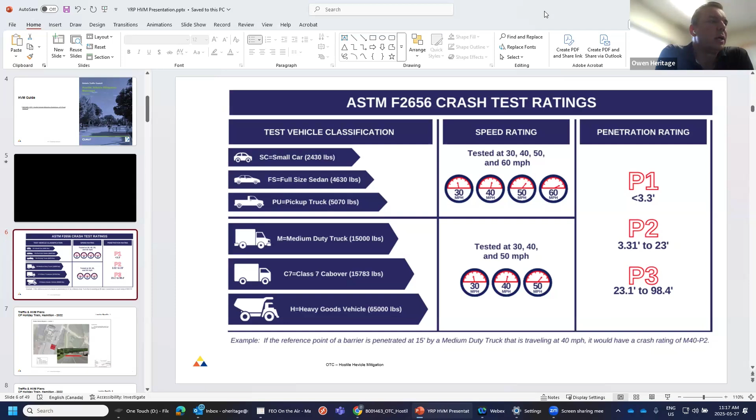So you need to be able to have the space and utilize the space accordingly to protect the crowd and protect the people properly. So when we design a traffic plan itself, we build in that buffer zone. So when we're actually designing, you need a traffic plan, then you build a hostile vehicle mitigation plan. Within that plan, you build in your buffer, so you're safely protecting the occupants within it.

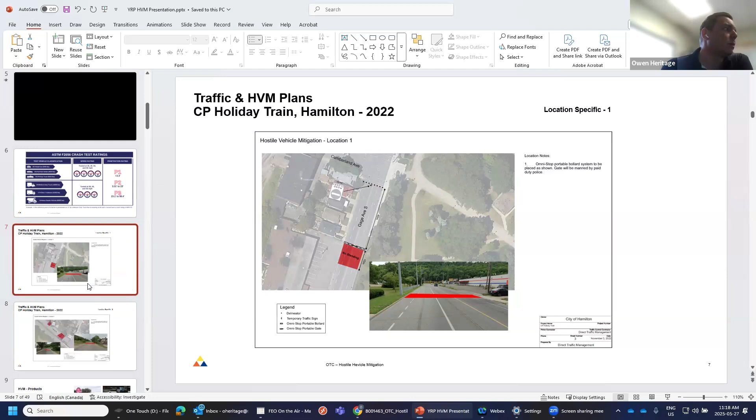And what happens is if you stick out an HVM barrier, you give this misconception of safety, but if it's not put out properly, it's not as safe as what it appears to be and what everybody believes it to be. So the most important part is understanding what barrier you're going to use and what it's being tested at and what it's rated at, so that when you design your surroundings, you have the appropriate space. And that you blend the traffic management plan and the HVM plan together. Space is always a premium in events because you have a certain square footage and you want to fill it for events.

But the most important part is to actually build in that buffer area. And this is where the misconception comes in. The other thing is, if you look at the picture on the screen here where we built in the buffer zone, most people always focus on blocking the roadway, but vehicles can get around. So if it's a planned or coordinated attack, vehicles can get around the barriers by using sidewalks or boulevards.

So you also want to take into account, and when we build a vehicle mitigation plan, we look at what is in that physical area. Is there a lamp post? Is there a planter? Is there other obstruction? So you can use physical attributes within that roadway to help you when you're actually planning out. Is it a tree? You can coordinate on where you put your placement of the barrier itself.

So there's lots of different HVM products on the market, and there's lots available for purchase and rent in Ontario. Each one has its own sort of set of standards, and each one comes with its own pluses and flaws in terms of how it goes out, and each one has its own cost structure. The more heavy duty barriers obviously are more expensive because it takes equipment to move them to site.

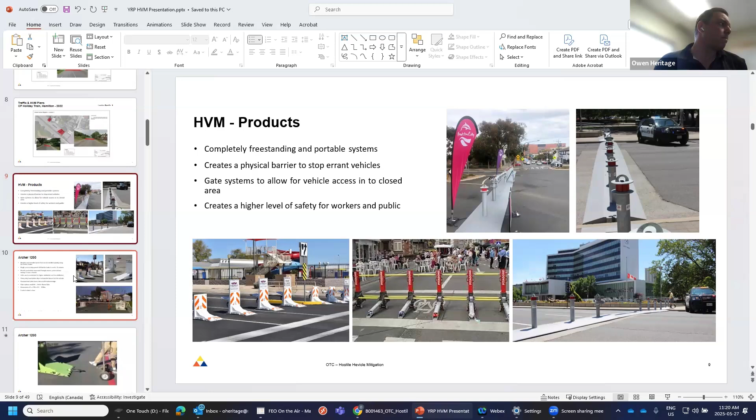And once they're at site, if you look at the top right corner, that's called the Omni Stop. We'll get into it later. But you need heavy equipment to move that, and once it's in, it's not movable. Whereas if you look at the other two, those are classed as temporary barriers. They can be built on site and they can be moved. So we'll go through some of the product that's available in Ontario that's on the ground right now.

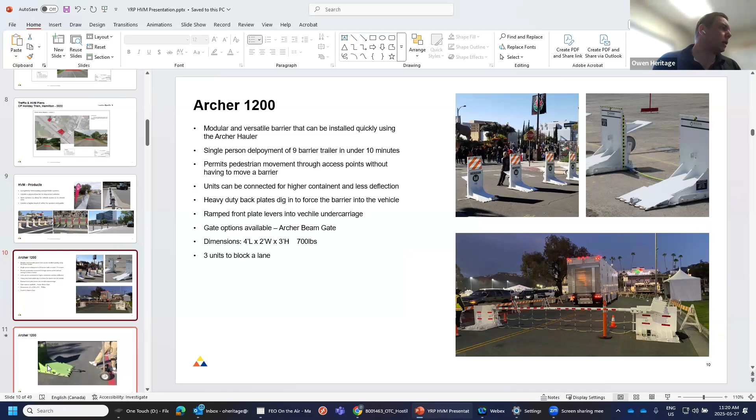So the Archer 1200 is made by Meridian. It's a 700-pound barrier. It's designed to be hit, and it immobilizes the vehicle. Now, this is rated. All of these temporary barriers are rated to P3 ratings. So this will travel to a maximum of 30 feet before it stops the vehicle. I'll give you a quick video here of how it moves.

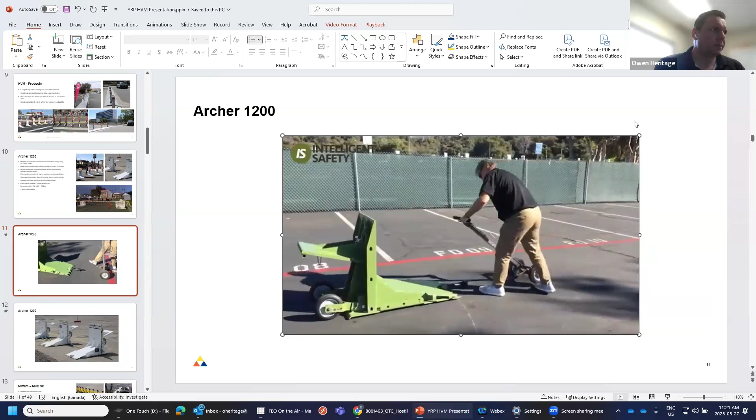As a temporary barrier, it moves fairly freely and openly. The one thing with this barrier is it's 700 pounds, so it does take a larger person to actually move it with that dolly, but it is very effective. I'm gonna run this next video here so you can see how it reacts in a test.

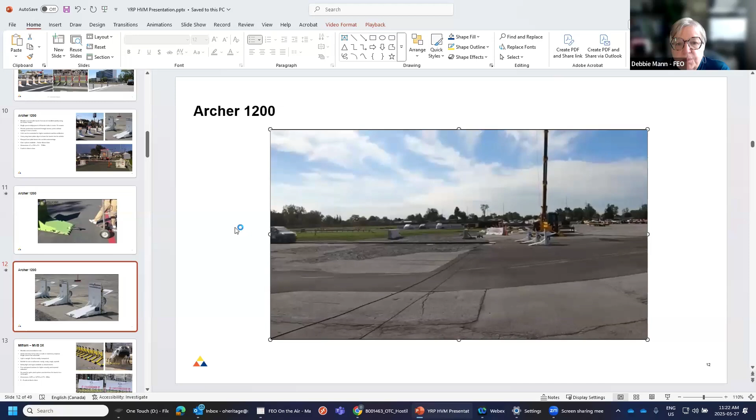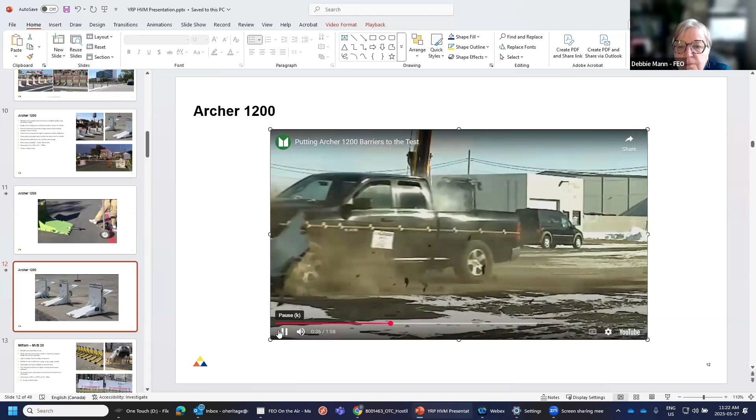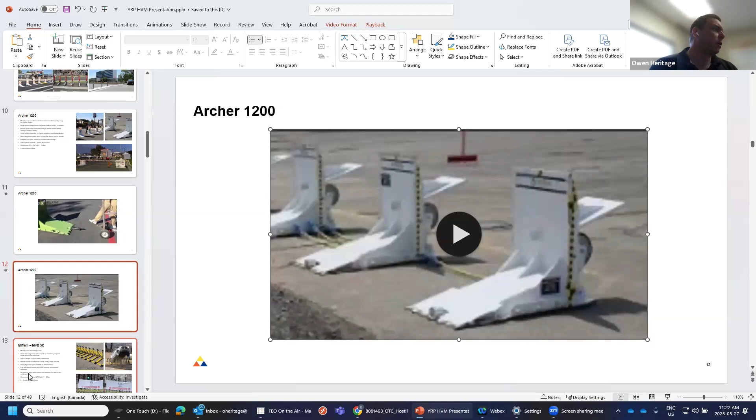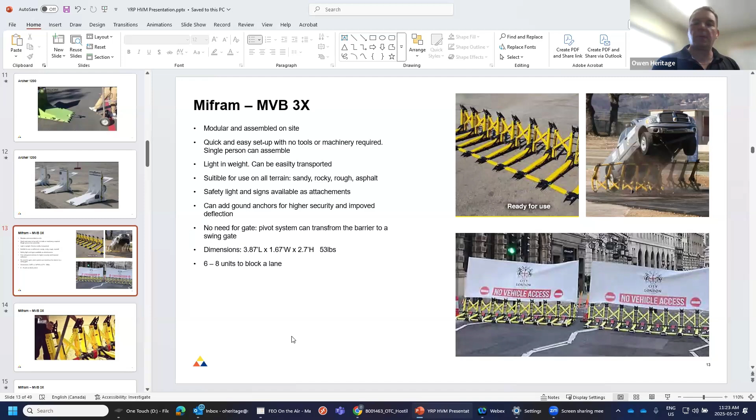But if you look at when the vehicle hits the Archer barrier, it's the travel. And that's really the biggest thing that we try to emphasize: once a vehicle hits it, how far it will travel. The other barrier available in the market is the MVB 3X barrier. It is lightweight. Each unit weighs 53 pounds, compared to the 700-pound Archer barrier. So it can be easily taken out, deployed quickly on site, and it can be rapidly moved.

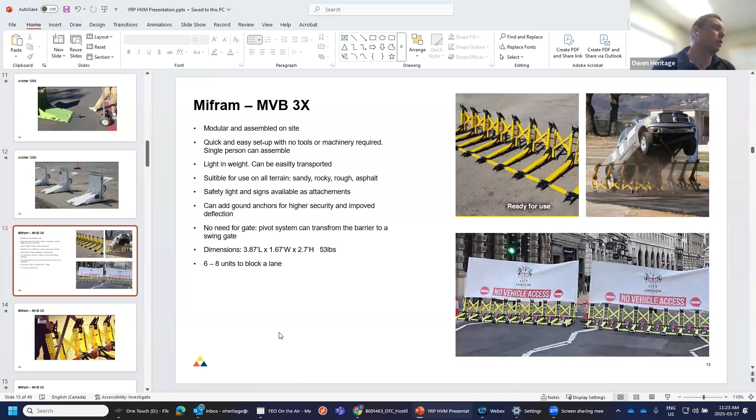It's rated P3, but it's rated at that entry level into P3. It will travel just over 20 feet when it gets hit, and this is the first product that came out into the market, and it's the tried and tested, most tested barrier in the market right now. And this is what you'll see at most events. There's more Mifram in the Ontario market than anything. I'll show you a video of how easily and freely this product moves.

So this one is rated heavier than the Archer barrier. So I'll show you an example of what happens when it gets hit so you can see how it works.

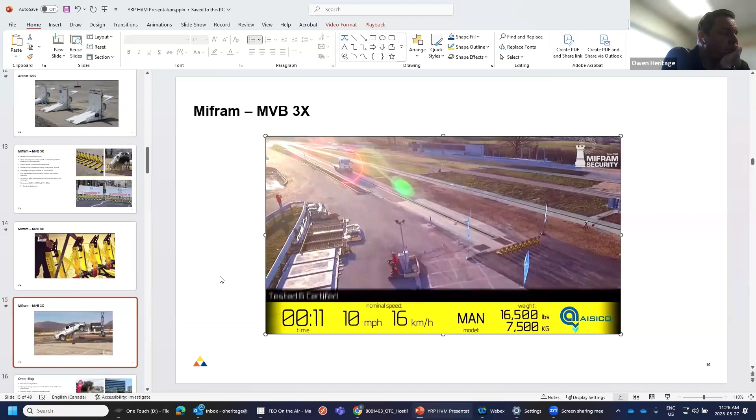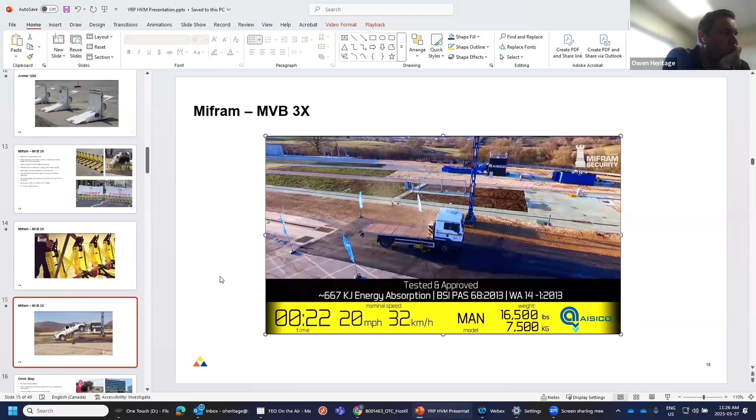About crash testing, these barriers all use the same principle. If you look at a crash system on the highway, that's what we call an energy absorption barrier. Those barriers are designed to protect blunt ends. When a vehicle hits those barriers, it absorbs that energy from the crash. Half of it goes into the absorption of the barrier as the barrier crumples, and half goes into the vehicle to protect the occupants.

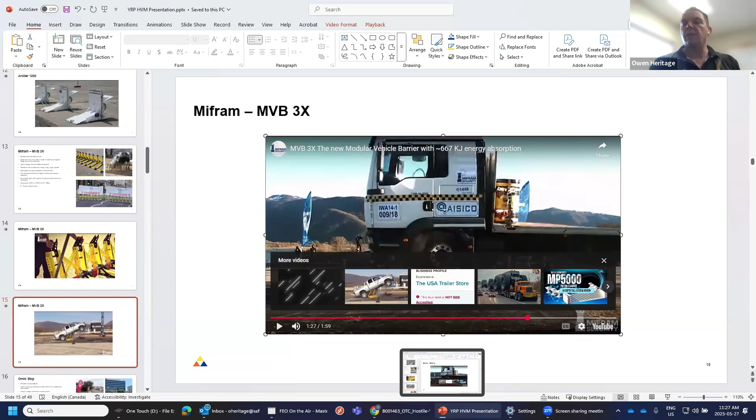These barriers use the same principle, except they redirect the energy up underneath the vehicle and lift the vehicle up off the ground. That's how they're designed. So for events, we typically look at either the Archers or the Mifram because they're less destructive barriers. When you get into P1 rated barriers, it's like a wedge style barrier. What they typically do is take that energy and drive it into the ground, which disables the vehicle right away, but it also crumples up the occupancy cab of the vehicle.

So if you look at most of the intrusions into events, 99% of them are pedal error, somebody's distracted. They've got into the event by accident. So when you're looking at your barriers, you really don't want to harm the occupant of the vehicle because it's an unintentional direction that they've gotten into the event itself.

When you start to look at different events where the political climate changes or the threat level changes, that's when you start to get into the P2 or P1 ratings, because there's a higher chance of threat that somebody might come into that space and you just want to eradicate that threat.

The Omni Stop itself is a slightly different style of barrier. So it's a heavy metal base with what are typically bollards on top of it. These are heavy weighted barriers. It's more of a longer term barrier than the other two. The other two you can rapidly deploy and set up and tear down. These ones are for more longer duration.

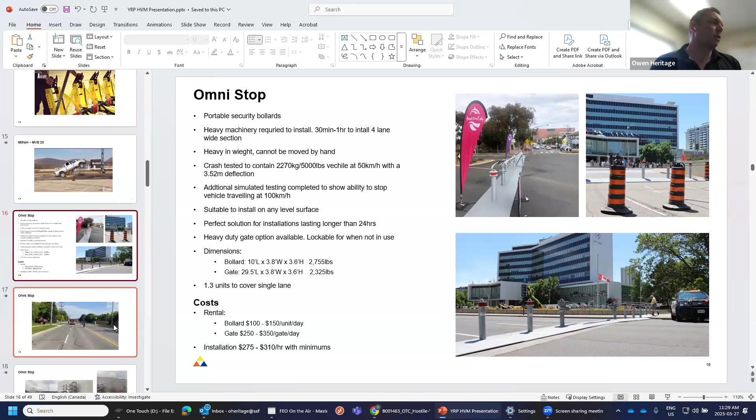It works on the same principle. We've used it at different events. There's a gate built into these barriers, so it works with any emergency service vehicles that need to get through. They're a decent alternative to the other temporary barriers for a longer duration period, where you're going to have the barriers out on the road for more than a week. These are quite handy to put out. I'll show you what they look like getting hit.

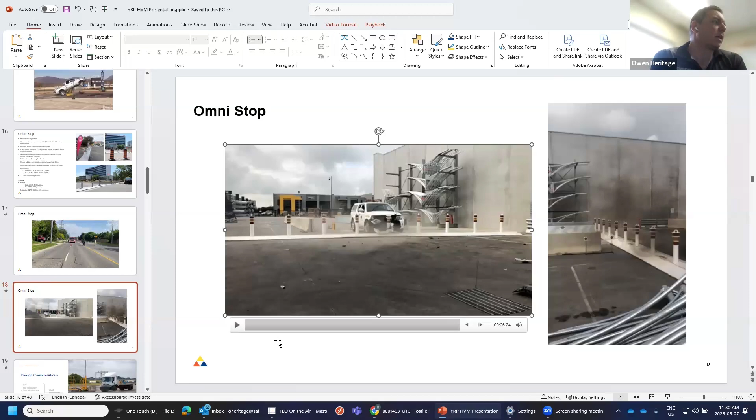Then we get into more permanent structures that are available, temporary and or permanent. If you look at Cafe TO, they put out concrete blocks, and we've already gone through the concrete blocks and how they work or don't work. A lot of people think of putting planters out to stop vehicles. Well, planters aren't rated. There are rated planters, but most of the planters out there are just a concrete shell with your plants inside, and they react the same as the concrete barrier, as you can see from the picture here. It's a false sense of security putting those out. It's more of a visual deterrent.

So when we get into the actual planning itself, if you're going to put product out as a visual deterrent, make sure it's noted in your traffic plan. If you sell a security plan or an HVM plan, you have to specify what the rating is and what it will do if it gets hit. And if you're putting something out as a deterrent, just make sure it's listed in that plan as a visual deterrent.

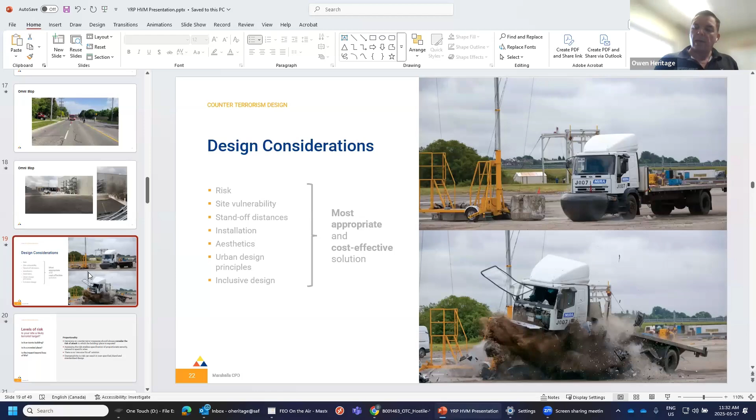But if it's not listed, and something happens in the event and it causes civil litigation, this is where a lot of events run the risk: where does the liability sit? The liability sits in the planning itself. If it's planned and deployed properly and all the information is shared, then you're more defendable than if you've put something out thinking this is better than nothing, but it's not designed to be hit in that manner. If you hurt the occupant of the vehicle or people at the event, if we look at some recent events in the US, it just turns into civil suits. So it's about collecting the information and sharing the information.

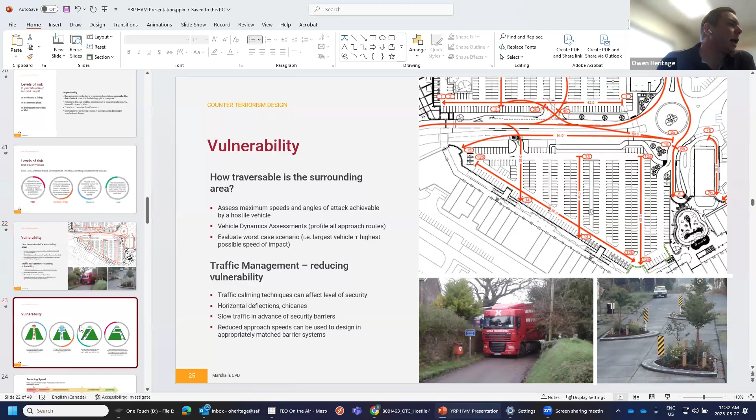I'm gonna jump ahead a little bit. So when you're planning, you really want to look at the route leading into your event, what is in place. If you look at the bottom right picture, they're permanent traffic calming devices, but you really want to look at what access vehicles have coming into your event, and then how can you protect or slow down that vehicle itself.

So when we plan events, we always talk about it. If you look at the first picture, we call it a runway. Most events are on main streets. Those main streets are the perfect runway into the event. So what are we putting in place, or what can you put in place, to slow the vehicles down?

So even if somebody's coming in by accident, we're reducing the speed of that vehicle heading into the event. So you want to look at where your final stop is, where you put your HVM product, and then work backwards into how far backwards and how quickly can a vehicle pick up speed.

So we look at building temporary chicanes, and that's what we use the concrete barrier for, or the archers for, or you can use water barrier planters, anything in the road that makes a vehicle serpentine, and control the speed leading into the event. So when you start to plan, those are sort of the critical things.

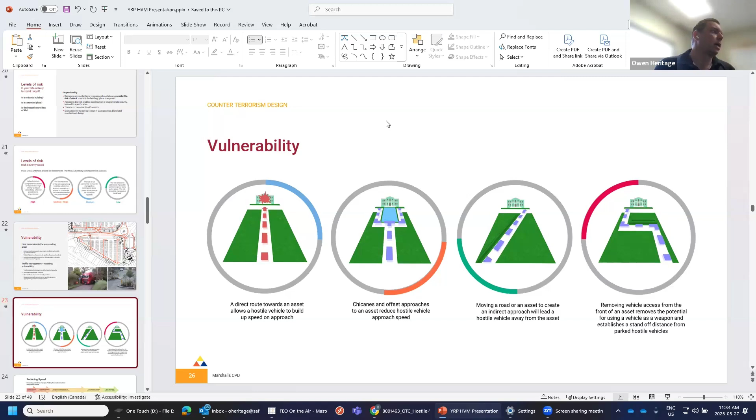And when you walk through the guidelines, and you're doing your risk assessment, that's one of the questions in there. So you start to look at your surroundings and what's around you, to build out your plan. So you can see there are lots of different access points, and there's lots of different ways to reduce the vehicle speeds. We'll get into temporary or more permanent installations.

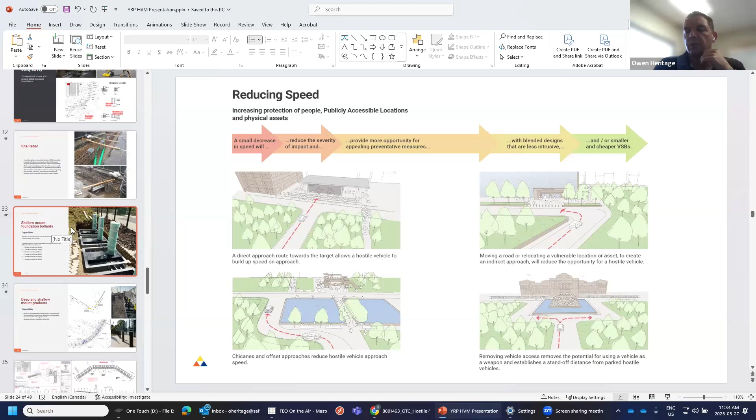So if you look at a lot of storefronts, or even if you look at Enbridge, all the Enbridge gas mains around have bollards on them, which are a steel post with concrete on them. They're not crash rated. They're more for bump protection.

But if you need to protect an actual asset in around your community, you really want to look at a crash rated bollard. This is a good picture here because it shows a shallow mounted bollard by Marshalls. This crash rated bollard, you can see all the infrastructure that goes in the ground to make it a P1 rated bollard.

So these bollards themselves will protect whatever infrastructure you have, or if you have an event at the same place every year, or it's a fairgrounds, you want to look at permanent over temporary. You really want to look at the rating and what the bollards are, because most bollards that get put out are not crash rated.

If you look at Commonwealth Stadium, I think it was about 6 years ago, they put in a brand new crash rated gate, a beautiful gate, and they put bollards around it. They didn't put crash rated bollards. A driver inadvertently came over the sidewalk and hit that bollard, and all that bollard did was lift that vehicle up and make it airborne, and it landed on top of their brand new gate. So you really want to look at what type of product and what you want to protect, and there's tons of it in the market available for you.

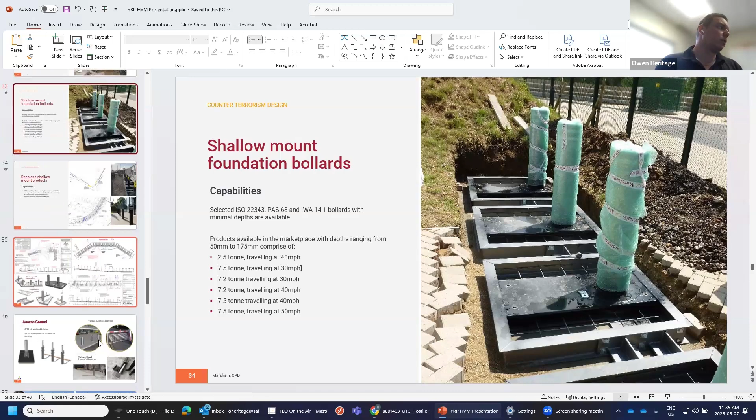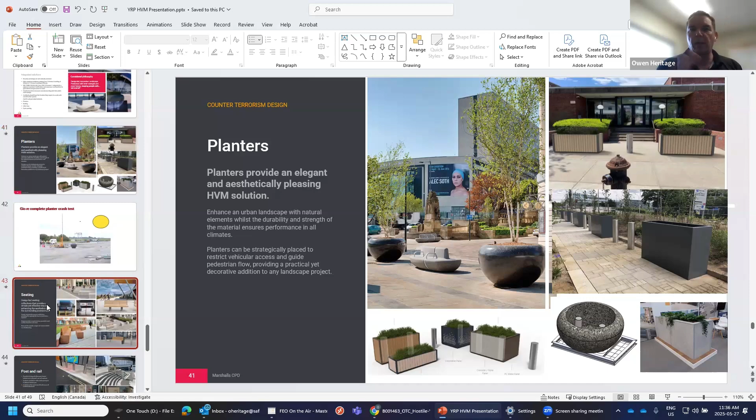And the good thing is they can be blended into the surrounding area so they don't stand out, and you can turn anything into a crash rated bollard, from any design. So if you look at these planters, for example, these planters have bollards inside them, but they're aesthetically appealing to the landscape around. So any urban planner looks at the design, and you can create whatever product you want inside a community or inside your event that's permanent.

They do have temporary solutions as well. But when you look at the hostile vehicle mitigation barriers, the temporary ones, they sit on the ground, they don't penetrate the ground. If you look at anything in terms of furniture, planters, or anything, for it to become rated, they typically will pin into the ground or take up infrastructure underneath the ground. So it's more of a longer term solution.

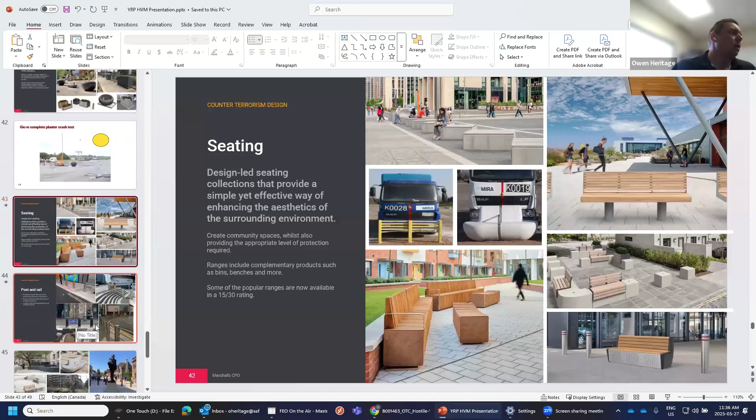If anybody's been to London, England, if you look at all the bollards, London itself, as a city, has completely protected all of their buildings, all of their sidewalks in the city core, and they have different designs. So you can make any design you want. Everything's available in the marketplace for all these different landscapes. If you look at the Arsenal football stadium, the letters themselves have bollards inside them, so you can hide in plain sight. You can hide all of the vehicle mitigation equipment for more permanent structures.

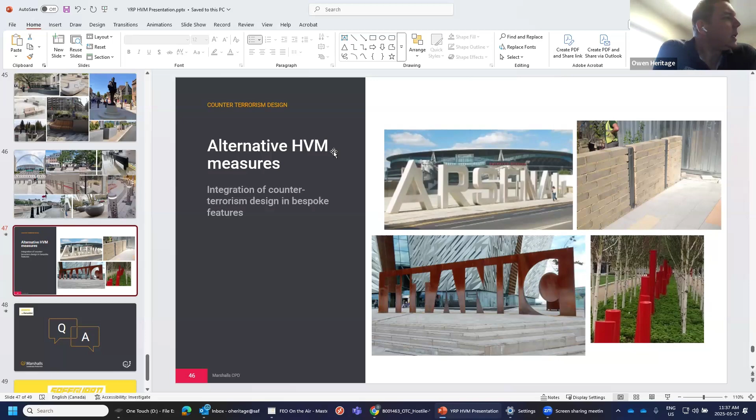So with that, I will leave it to questions from there. And there's a lot of information. It really comes down to what type of event you're having, where your event is, how many people you're getting in, what the congestion area, your access and egress points are, and then how you protect it. So when you're building your plan, it's really looking very early on, and building your HVM plan alongside your traffic management plan.

So that was really enlightening.

Those videos were a little bit shocking, but so important to understand what can happen out there. Peter McCluskey asked, are water-filled barriers a viable and tested option? They're designed for low speed. They're MASH tested. So water barriers are MASH tested, which is your highway traffic standard.

MASH tested, again, is a redirectional barrier. So they were tested at a 45-degree angle, the same as a concrete barrier. So they're not designed to be hit at a 90-degree angle, and they will fail being hit at a 90-degree angle, the same as a concrete barrier. They're good for building traffic calming devices in the roadway, but they're not actually good unless you're running along an event. When they're hit at a 45, they travel over a meter into the event space while they redirect the vehicle back into the road.